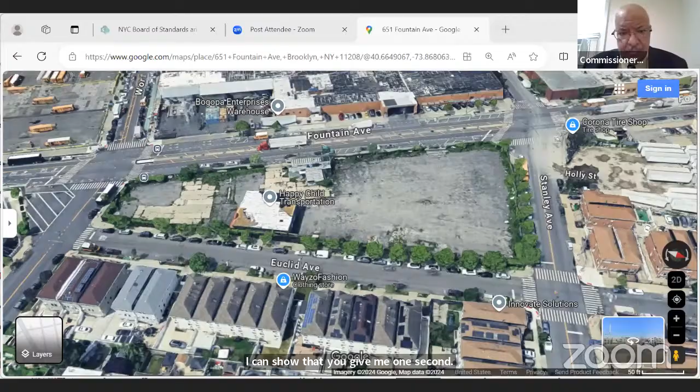Oops, sorry. Yeah, here it's about 10 plus 10. It's almost 20 from the menu board to the fence.

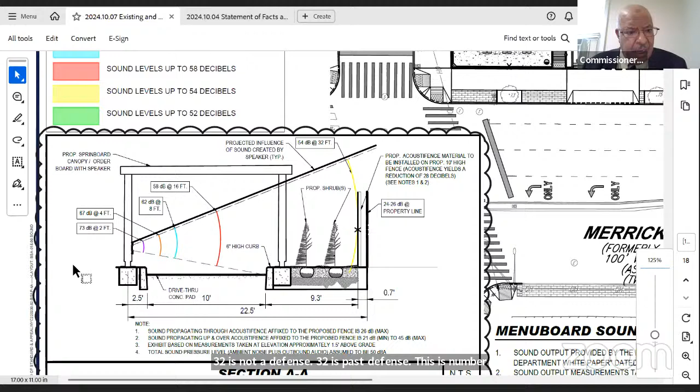Now, if you go to the section, there are two issues with that section. That one - here it shows the 54 contour. It says at 32, which is more or less at the fence. But 32 is not at the fence, 32 is past the fence. This is number one. Number two, I see that the starting point here is 73.

73 - the way the AVC works, it measures the ambient noise. Let's say the ambient is 40, then it adds 15 on top of that. So the output by the AVC is limited to 40 plus 15, 55, not more than that. The way this diagram is built, I believe it's taking whatever the speaker can emit, and running the double distance analysis over the distance between the menu board and the fence. I need them to fix the location of that contour and fix that number to make sure it's the ambient plus 15.

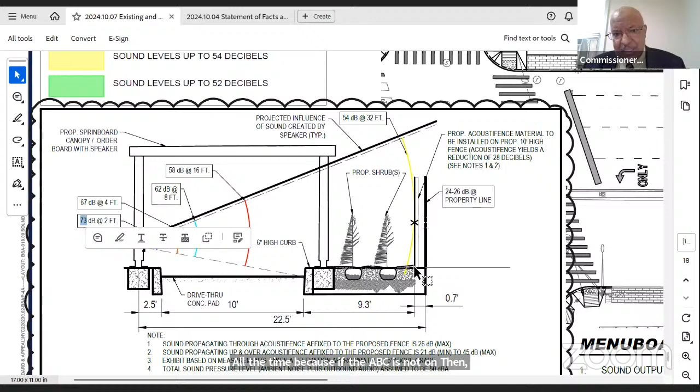And more than that, I need them to put a note on the plan saying that the AVC will be on all the time. Because if the AVC is not on, then noise will propagate to the adjacent property, which we know is close to the building. So very simple - fix that section, and fix that statement that talks about 35 feet between the menu board and the residential property line. Thank you.

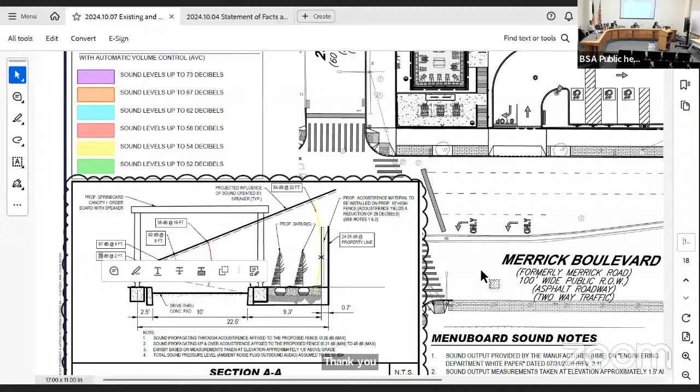So according to the plan, it's 32 feet, not 35 feet. As I'm looking at the plan, from the back of the menu board to the interior face of the fence, it's indicated as 32 feet. I don't... no, that's a typo, I believe. I believe the 32 feet is to the other side.

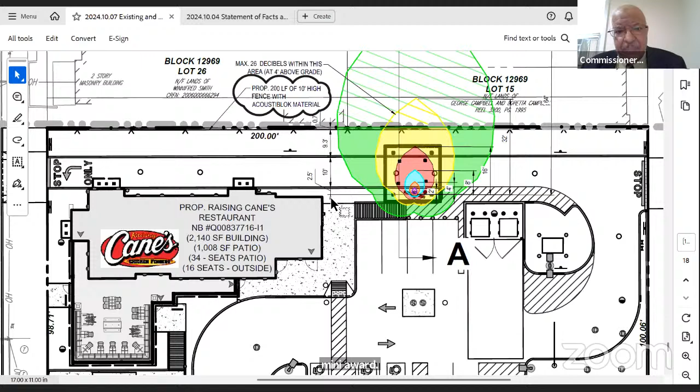If you go to the left of the canopy and the menu board, there are three dimensions actually. The first one is 2.5 - you see that 2.5? That one. The 2.5 is to the center of the menu board actually, and it's from here to that line. So 2.5 plus 10, that's 12, plus 9, almost 20 and change.

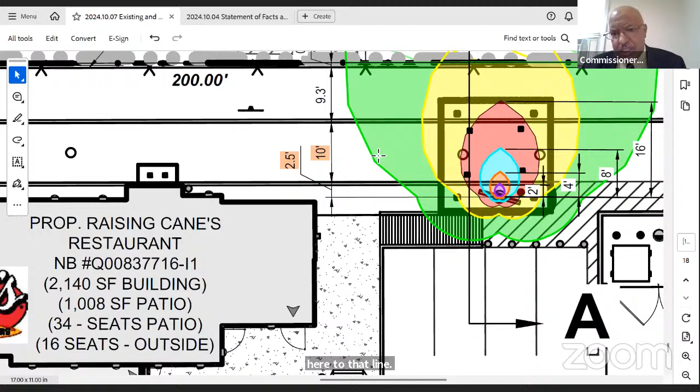Okay, so there's probably something wrong in the dimension, because if you go to the right of the diagram, after 16 feet there's an arrow - I see it. You're talking about this one, right?

That goes to the building - okay, that is the fence. Not to the building, it's to... the tip of the yellow diagram. Okay, I get it. Okay, yeah, I'm reading that incorrectly because that is the fence. That X is a fence thing. No, that thing, I get that, that's it.

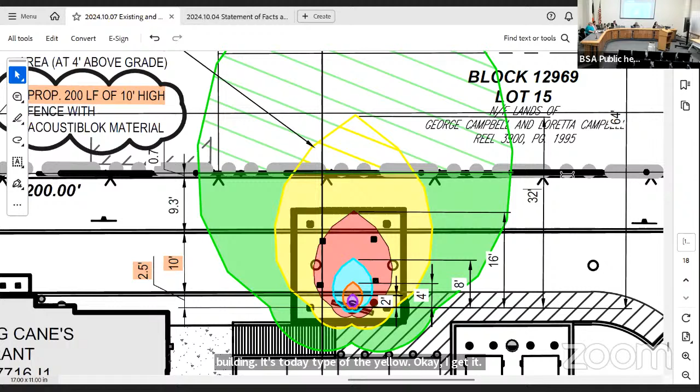It's the triangle - if you see, this is repeated on the fence. This is like an indication or a symbol that indicates the fence. Yeah, I misread that X, it looked like the end of an arrow. Yes. Anybody can do that. Yes, I agree, it's very confusing.

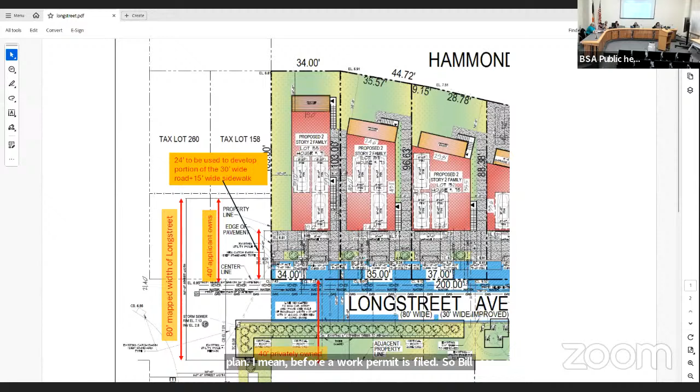I think these are valid questions that need to be delved into, because this would affect the site plan, and any change in the site plan resulting from discussion with DOT or DOB would require the applicant to come back and revise the plan. Based on everything I'm reviewing, I don't think we can allow any construction on this site to start until DOT and DEP have reviewed all the necessary builder's pavement plans, because slope conditions and all of those are important. Until those are achieved, I don't think any work permit should be permitted on this site. These issues need to be resolved before a builder's pavement plan is approved, and before a work permit is filed.

So those are my reasons, and I just wanted to lay it out. I don't think you all had a chance to look through it, but we will schedule this for another hearing, which will also give DOT time to review this application, and we can hear a response from the applicant.

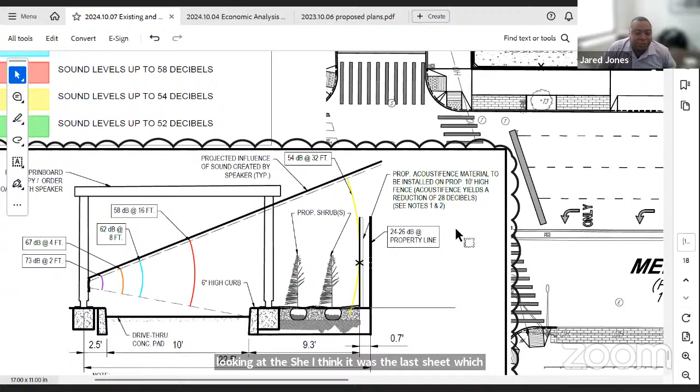Yeah, is that height shown in the plan? Can somebody share the plan? Which height are you referring to, Madam Chair? The height of the canopy or the height of the fence? I want to see the height of the canopy and the fence together and dimensioned. I was looking at the sheet, I think it was the last sheet, which has the section. So we call out the 10-foot high fence. I don't believe we call out the 10'6" to the canopy.

I can add that to this section if you like. Which one? The height of the canopy. Yeah, so the bottom of the canopy where the lights actually are is 10'6". I can add that to this detail or section. Okay, yeah.

And while we have this up, I know Commissioner Shetta had some comments on this section. Yes, I have to go back through this, the numbers are... Can I interrupt you? Go ahead, sir. Before we proceed, regarding the lighting and the obstruction of the lighting in the model with the shrubs, the landscaping, and the fence, the canopy is taller than the fence, so most likely the light can shed over.

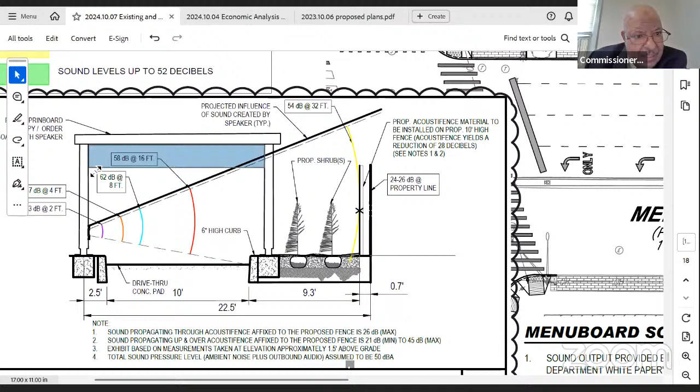Well, I was thinking of a 12-inch shield that may also act as a barrier for the sound. You mean put it deeper like that, along the rear? Yeah. But the sound source is here, so it's not going to help with the sound, even along the rear parallel to the rear lot line.

I mean, we're already kind of taking care of the sound. That's accomplished by the 10-foot high fence and the Acoustifence on it. And if they put the AVC on all the time, they commit to that, so I don't think they have a problem with the sound.

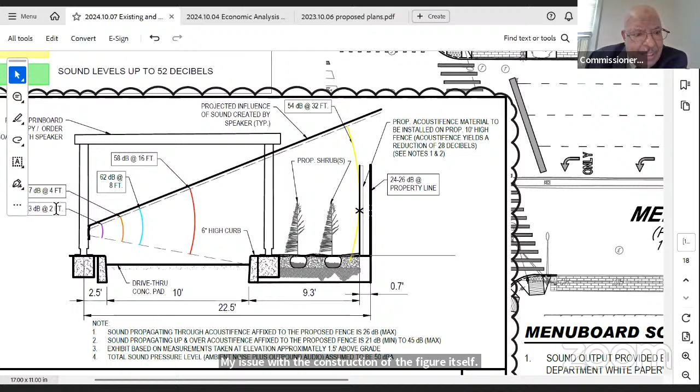My issue is with the construction of the figure itself, I'm not sure if it's based on ambient plus 15 or whatever the speaker can emit. Yeah, this section needs updated. It was based on what the speaker can emit. To your point, yes, you need to replace it. So the AVC will always be on. We'll note that, and these numbers and figures will get updated accordingly.

So a shield across the canopy on 3 sides? For the light? Just for the light, if they shield this long side, that short side, and the other side of the canopy, I believe it would do it. And if they want to put single shielding instead, it's up to them, it's their choice, but I would prefer to shield the lights.

Because this canopy is only 10 foot 6 inches, if you start cutting into that, then you have to worry about cars or trucks, taller trucks, potentially hitting it. So I would prefer to shield the lights individually if that's acceptable.

There's a minimum clearance height that would be needed. So you cannot put it perpendicular to the rear lot line, but if you put it parallel to the rear lot line, that yes, I get it.

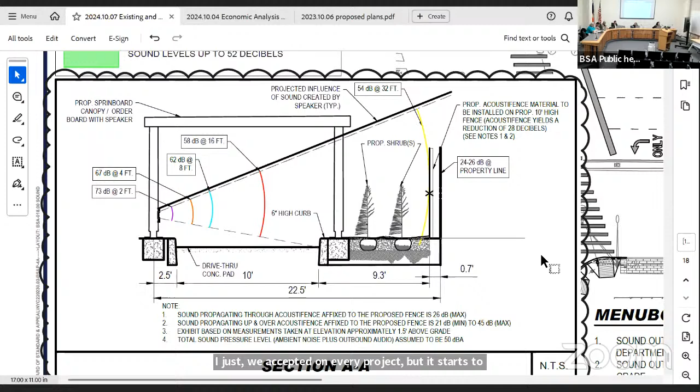We accept it on every project, but it starts to get wonky when it doesn't look proportionally like what is being shown. Is it hard to fix this? It's not hard. Can we update the section to be accurate to the actual project? Yes, we'll take care of it, overlay the rings on top in the correct dimension. You're talking about drawing it to scale. Probably a 15-minute CAD job. I think that would help in the future. No problem, we'll start with this one.

Thank you, Commissioner Yoon and Shetta on that one.

So on the noise part, you're planning to modify the entire diagram to put here, instead of the 73, the ambient plus 15. Do you have measurements for the ambient by any chance? I do not have measurements for that, just the standard accepted ambient numbers, which is generally in the 45 to 60 range.

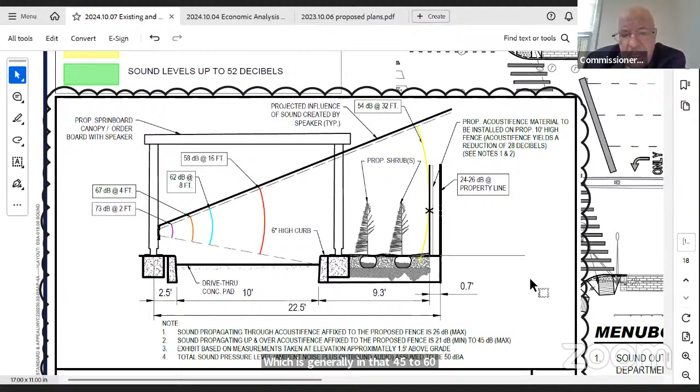So I will update this. The distance is 20 plus, so you're going to be okay either way. I will update this based on making it to scale, and please put that note regarding the AVCs accurate on all plans. Put it on the plans and make it bold, boxed, just to make sure they are aware of that. Will do.

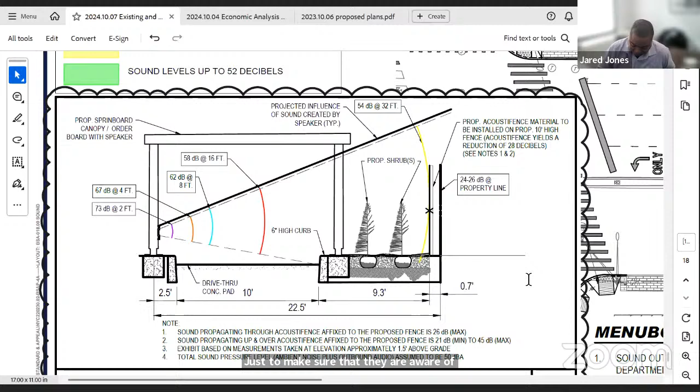Thank you so much. The question I had is, is the light going to be on in the canopy even past business hours? No, the lights are naturally turned off, but based on the comments, we're looking at potentially reducing them just from a safety standpoint at night. But they're supposed to turn off when the store closes. Okay, that's fine, I just didn't want it to be on at its brightest point all throughout. If you're going to turn it off, that's fine, that's your decision, but if you want to keep it to a minimum for safety, that's okay too. I just want to make sure it's not going to be glowing all throughout the day and night.

100%, I forgot to mention that. We can confirm that if they're on after hours for security reasons, they will be at a much dimmer basis. Okay, thank you. Mr. Jones, do you mind also submitting the AVC cut sheet? I know it gets submitted with each project, but it's helpful to not dig around for it in the other folders. No problem.

I believe we've addressed most of the comments. Any other questions? There's actually one I forgot to mention, I believe this was the chair's comment, as far as blocking access to 230th Street and Francis Lewis Boulevard. Mr. Jones has looked at that, there is room to put bollards on either side, so we would propose to do that and put a chain across each ingress way when we close.

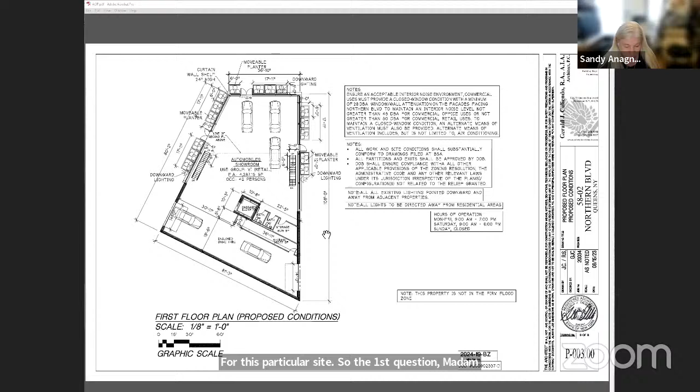So the first question Madam Chair had was to clarify the showroom area. Let me just ask one question. All I have in my record are 6 letters of opposition and 6 letters of support, and a supporting letter from the Queensborough President's Office. I do not have anything on record that shows a petition.

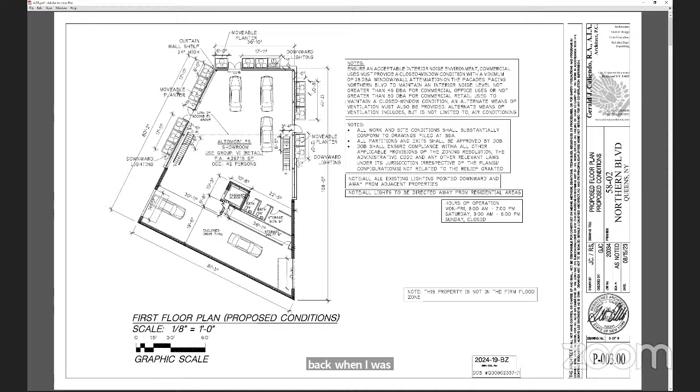We have it, it was submitted, we can resubmit, but it was submitted a while ago, before the first hearing. I saw it back then. It was submitted on July 23rd. Okay, all right, but there's a lot in that file for testimony.

So the total first floor area is 4,287.15 square feet, as noted on the plans. The drive-through area is 1,390.02 square feet, but that is not part of the showroom. That's only for bringing cars in and out of the space, and maybe on occasion if a customer really needs to park there, but that's mainly for getting cars in and out.

The showroom area is here, and that square footage is 3,048.8 square feet, which is the interior area, not including the exterior wall. If needed, we can put those numbers on the plan and revise it to include that. So basically of the total 4,287 square feet, about 1,000 is the drive-through and the remaining, about 3,048 square feet, is the actual showroom space.

So you can see it's not a huge showroom because of the type of operation. It's mostly like retail, not a huge number of cars being showcased. It's a boutique style operation, maybe 3 or 4 cars, not a huge amount. And as we mentioned in the prior hearing, no test driving, no maintenance of cars, no picking up or dropping off cars. So it is a true showroom.

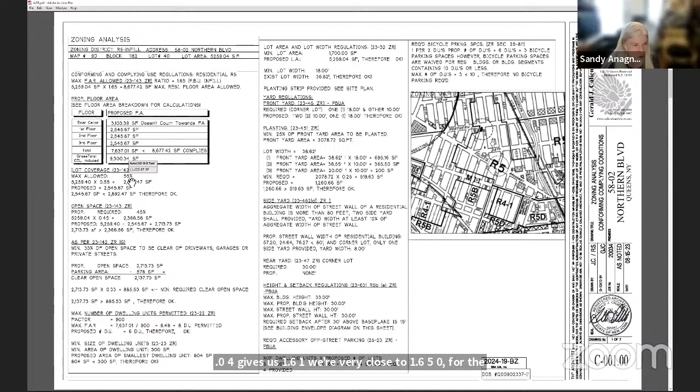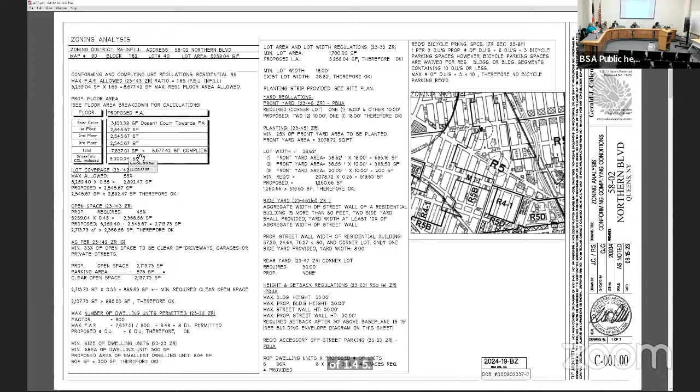For the as-of-right, we have total floor area of 7,637.01 square feet divided by the lot area of 5,259.04, giving us an FAR of 1.45. Predominantly built up is 1.65. So we took a look at this and said, for that 0.20 difference, what could we do?

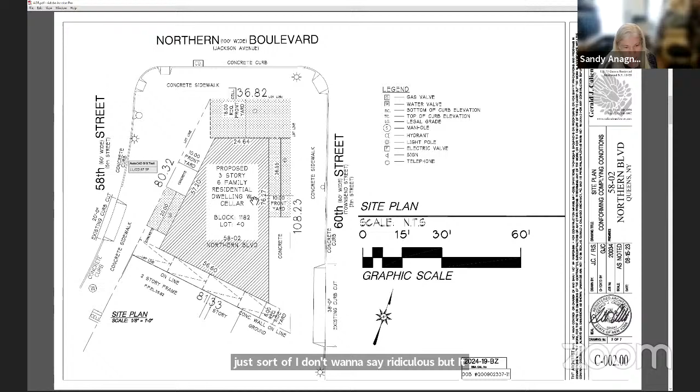Mainly the reason we didn't do that is it's just sort of ridiculous looking at it. I think anything above 30 feet, we have to set back 15 feet. So we did a little sketch here, and what we would end up with would be this triangle, which would be a 4th floor, because we have to set back on every frontage 15 feet.

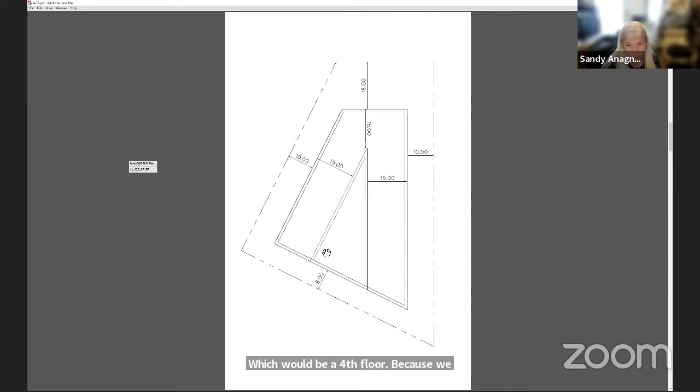Then we quickly laid out what we'd have to do that. It would actually affect the 3rd floor because we'd have to provide a stair to go up there. That would make the 3rd floor unit smaller, and we would end up with this little studio, which is like a true triangle, very odd shaped. So we didn't think that's at all functional or made any sense to build this little triangle up there.

This is very convincing. Thank you. Yeah.

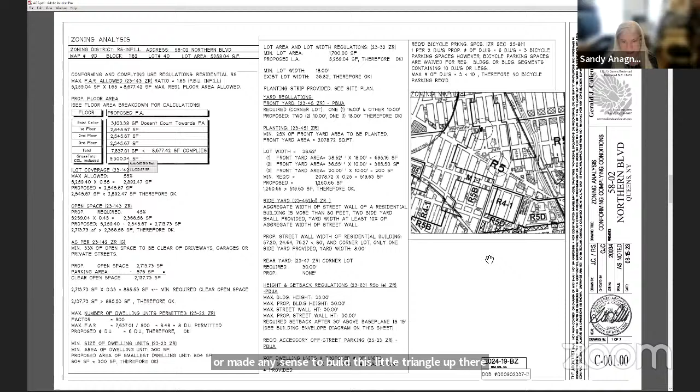Yeah, so these are just the other plans. And then the last...

Comment from the review was the deed for the adjacent lot on block 1182, lot 38, prior to 1983.

We did request that. We were able to get the deed for the subject lot. Looking at other records, the C of O dates back to—there's an NB of 1906, and then another NB of 1936, and a C of O of 1965. We do not have the deed for that lot, but we can request it again from the finance department in order to submit it for the record for the D finding.

But we're pretty confident that they were always separate owners between lot 38 and the subject lot. They were never in common ownership. But we can get that deed. We can request it tomorrow, go to finance, get it, and submit it.

Thank you. Yes. What were the other questions we had? I think that we were satisfied with the financials. I think those were the primary questions.

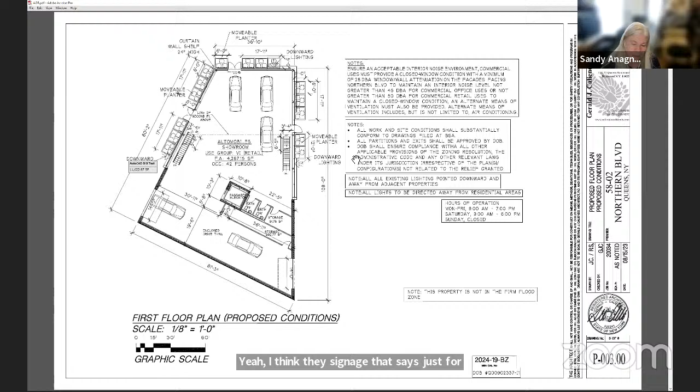It will be only for EV charging. So if you can just get that out in your statement and clarify. Okay.

Any other questions or comments? Okay, let's then go to the public.

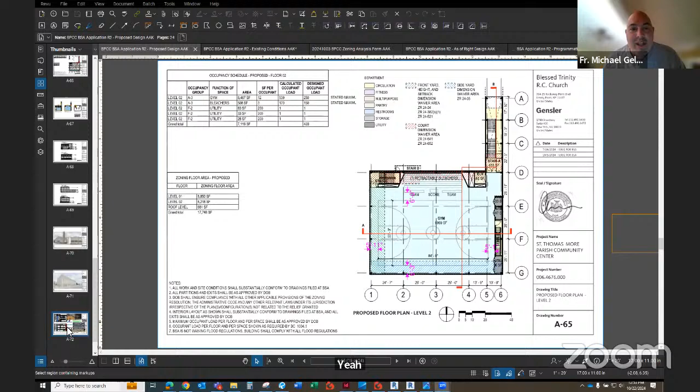So with regard to the height for volleyball, depending on who you're looking at with regard to the regulation, it seems that our research shows 23 to 26 feet for regulation play. That's unobstructed regulation play, meaning once the ball hits something less than that height, it's out of play.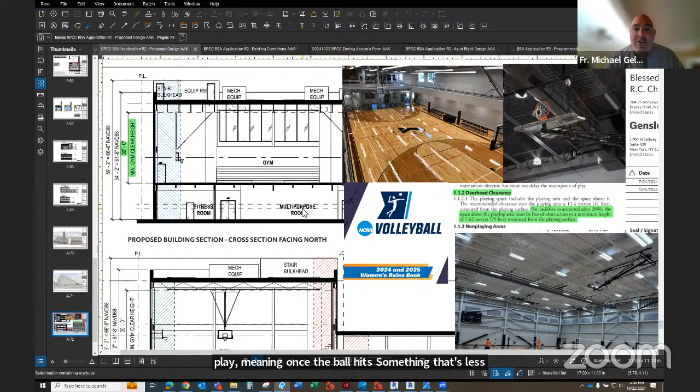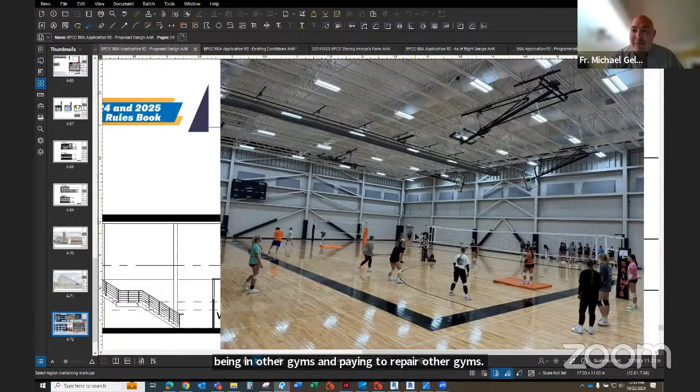The reason why we're requesting 30 feet is because, being in other gyms and paying to repair them, we know kids do not understand how to keep a ball within 26 feet into the gym play area. We're worried, as our experience tells us, that they're going to hit the lights, they're going to hit the ductwork. Plus, if we're playing volleyball, we need to roll up the basketball hoops into the ceiling, as this picture shows, so we have to get above the 26-foot height so it's unobstructed for volleyball.

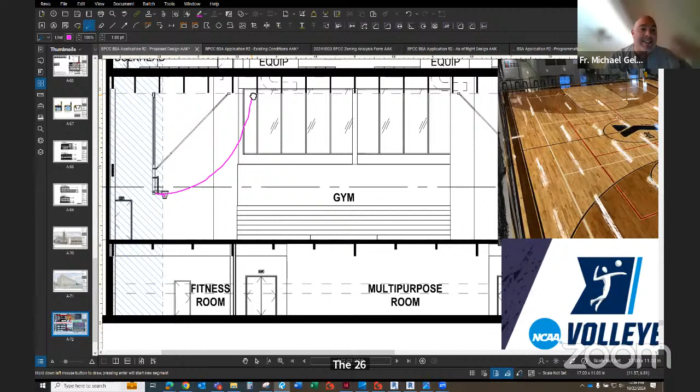So that's the reason we're asking for 30 feet of clearance so the hoops can clear it, along with the lights and the ductwork. Okay, that's good—if you can just put that in your statement, because that goes toward your finding for the waiver request.

Yes, we can elaborate on that in the statement as well as the programmatic needs report. We'll also clarify the portion of the runoff, just to make sure it's clear what we're requesting versus what's regulation—just showing the dimension.

So the 6 foot doesn't include the bleacher, it is past that. The bleachers are retractable, but regardless, even if there's one game held in the facility, there needs to be space for the audience, for the parents to watch the kids, for other attendees. So that's going to stay there for the program. Okay, good, thank you—no problem.

The board had also made a request with regards to the history of the site, specifically with the Breezy Point Cooperative. We've actually submitted Sanborn maps as well as a plot card for the site. We've exhausted all of the DOB records associated with this property to try to get a bit more background on the dimensions. We just wanted to clarify with the board what additional information you'd like us to submit.

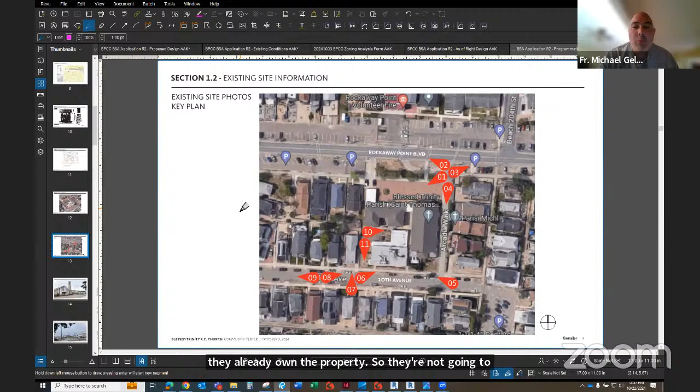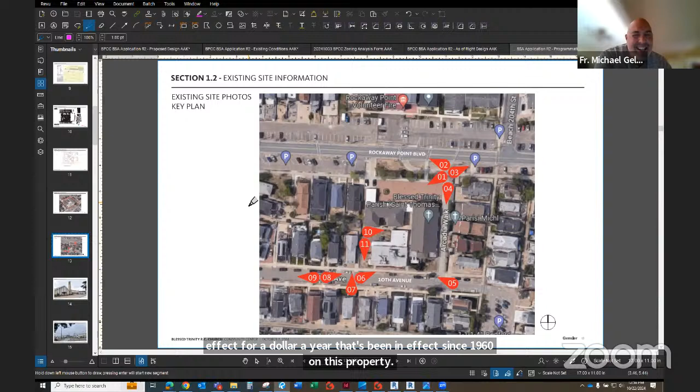We have a lease with the Breezy Point Cooperative, and in that lease it requires them to always provide the parking, but it also can't be taken away because they already own the property, so they're not going to take it from themselves and reassign it to themselves. We do have a lease in effect for $1 a year that's been in place since 1960 on this property, and it does talk about some of this. I don't know if that would be helpful.

I think that would be helpful if you can provide that document—it would actually clear up most of the questions I have with regards to the parking, and you can put that in your statement also.

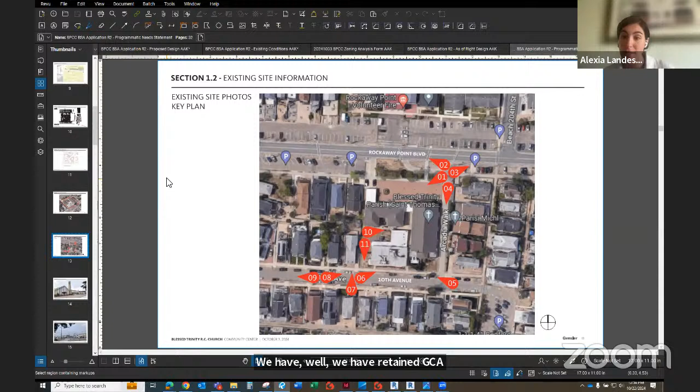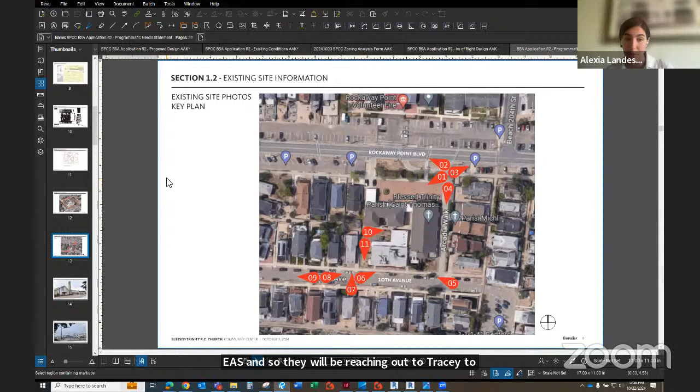Will do. This brings us to one of the last comments the board made with regards to the environmental review. We've retained GZA to assist with the EAS, and they'll be reaching out to Tracy to make changes to the short form that was submitted, as well as providing all the necessary submissions for the EAS as a whole. Once they run their traffic study, I think there's a lot of information we can incorporate into our findings as well.

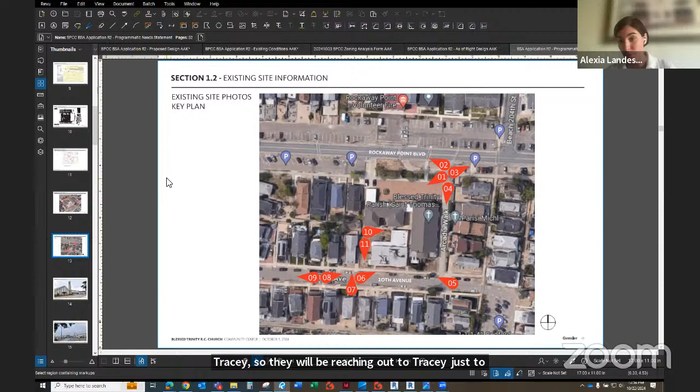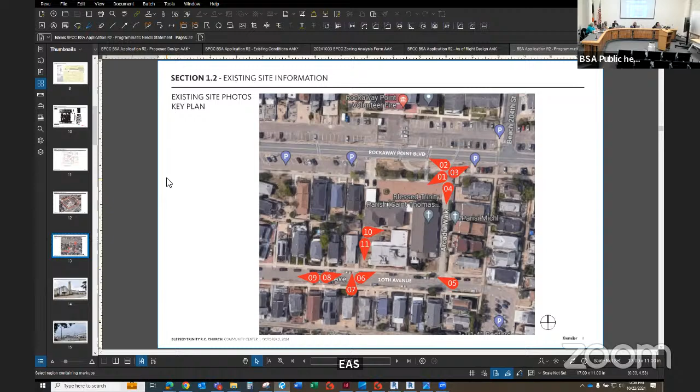Okay, I think with regards to the plans, those dimensions that I was mentioning - yes, and with that I'm actually going to hand it over to Gensler's team so they can share their plans, and then we can go through the board's comments with a fine tooth comb to make sure we submit correctly next time around as far as dimensions.

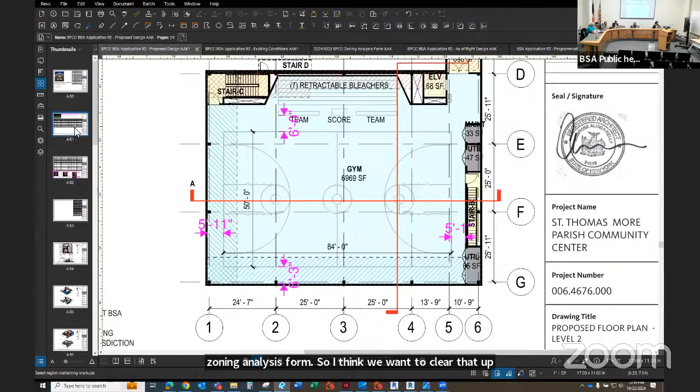And I think there was some confusion as far as the zoning analysis form, so I think we want to clear that up. Right, so the zoning analysis should be for the entire zoning lot. In this case, the zoning lot includes the 2 existing buildings, the rectory and the church. So your total zoning floor area should be the zoning lot, including the existing plus the proposed.

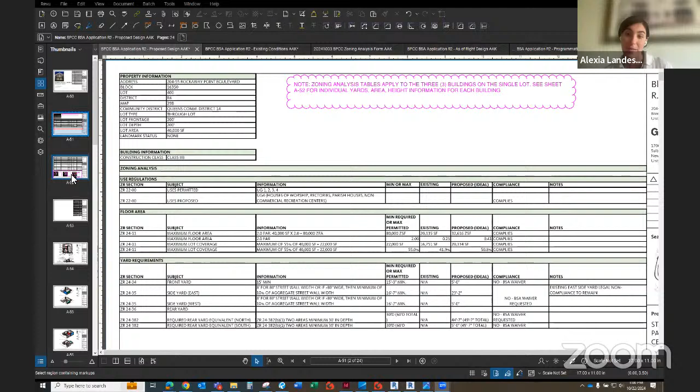I believe that was submitted originally, and then there was some discussion at the last hearing with regards to really making sure we clarify what is happening with the gym specifically, which is why we've submitted this zoning analysis to just include that building, so we can show you what the existing looks like versus the building height, because it can get confusing with regards to the heights of all 3 buildings.

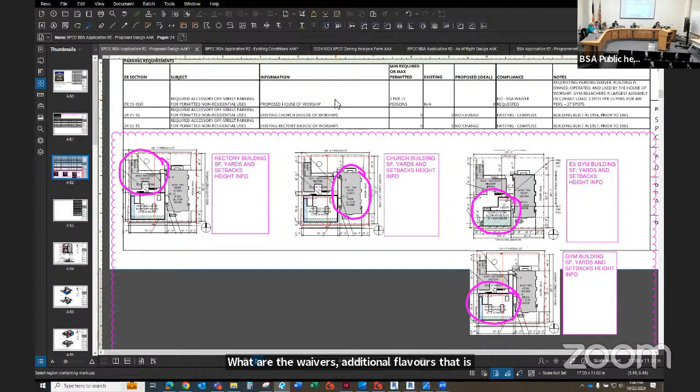Fair enough. But for the total zoning analysis for the zoning lot, it can be done in ways which show the entirety of the site - proposed entirety, what is the proposed floor area, existing and proposed, everything combined - and then specifically for that building, what are the additional waivers required. So you can have a third column specifically for the gym building indicating where the encroachment is for the yards, courts, and heights.

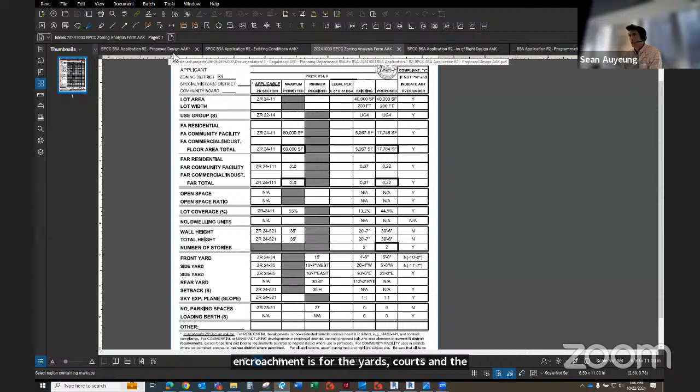Would it be helpful to have a breakout page that shows square footage, building height, yards, and setback for each individual building? And then the form and total zoning analysis will be for all 3 buildings on a single lot.

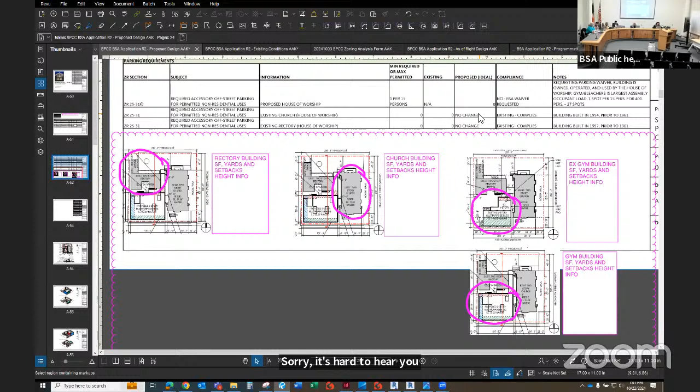Sorry, it's hard to hear you. So the only thing - for the total floor area, I don't want the breakdown of the other 2 buildings. I just want the total floor area on the entire zoning lot, including the existing, because we are not ruling...

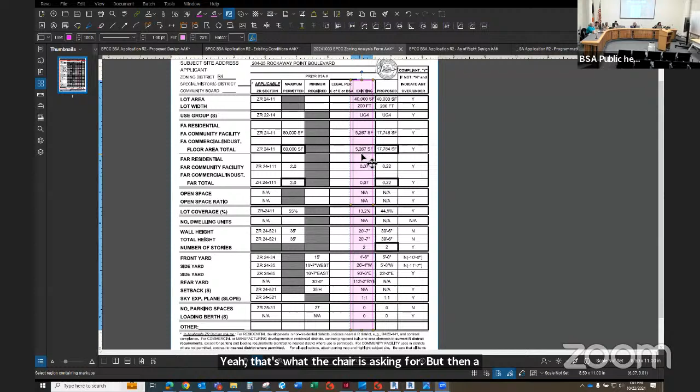Just to be clear, the zoning analysis form should be - and contrary to what I said at the last hearing, I realized - this should be for the entire site. Yeah, that's what the chair is asking for, but then a separate breakout chart in the drawings for the building in question only. Right, okay, so just for the gym - the existing gym building and the new gym building for comparison.

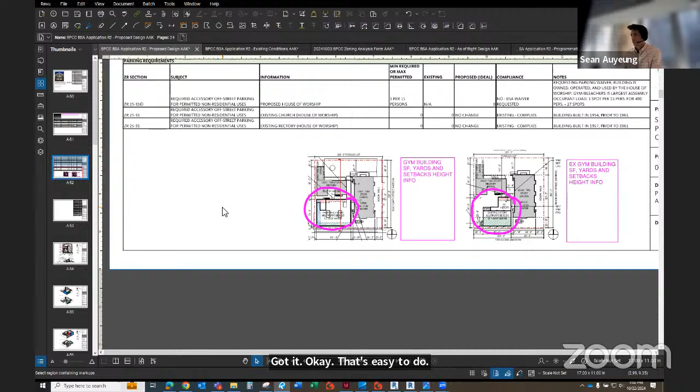Got it, okay, that's easy to do. We don't want any more information than we need with regards to the existing building. We just want the proposed. Okay.

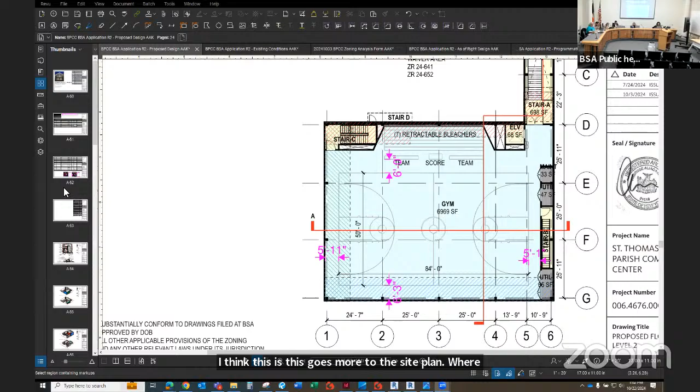And then I believe there was some request for dimensions, which we will provide to the board. Is there any specific dimensions the board is looking for? I think this goes more to the site plan where you're showing the area of encroachment. The proposed area of encroachment needs to indicate what these areas of encroachment are pursuant to which zoning resolution section. So I was just talking to Ms. Prenga, and what we'll do is give you a sample so you can indicate those on the plan.

Perfect. And then finally, I believe the Commissioner had made a mention with regards to the side yard and pushing that back to make it 6 feet. I believe we took a brief look at it - Sean, if you want to pull up the plans or the survey.

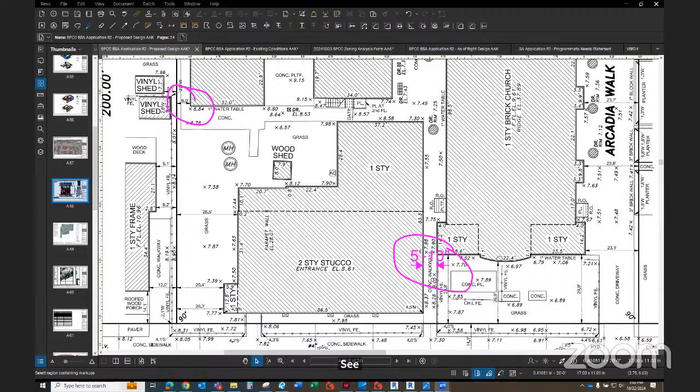Right, if they end up making the side yard 6 feet, I believe it's going to push the building - it would push us 1 foot further to the east, in a narrow way. You're breaking up, Alexia, you're breaking up.

Let Mr. Aya respond - maybe Mr. Aya could respond. I can jump in here, Amanda Iannotti. I think what Alexia was saying is if we push the building 1 foot east as requested by Commissioner Yoon, there's a pinch point there with a little jut from the church building that would then, right now at 5 feet, have a clearance of 5 feet 10 inches between the buildings.

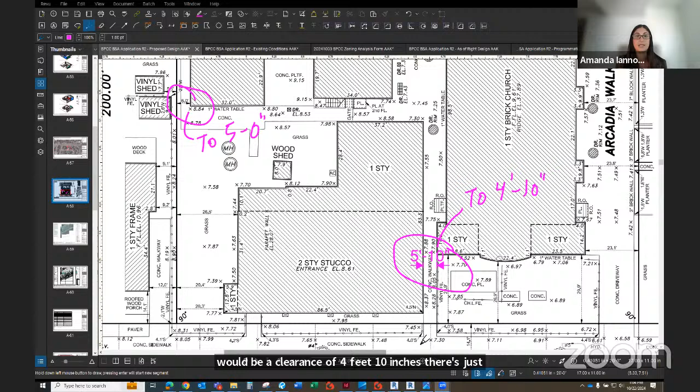If we move it, it would be a clearance of 4 feet 10 inches. There's concern about interior access on the site, or emergency services. 4 feet 10 inches is pretty tight. I mean, it's already tight, but it would be even tighter.

The thing I want to ask you, Chair, is that there's an existing condition that is a 6 foot wide side yard. That's basically the northern half of the site. My request was to match that because the required side yard is 16 foot something, 16'7" I think. We could squeeze the building a couple inches to get them what they need, or we can keep the 5 foot side yard that they're proposing.

So based on the programmatic need argument, they've already seemed to have compromised the runoff area for the courts. Standard requirement is 10 feet, it's been pinched already to 6 foot. So the only other alternative would be moving the building further to the left, which would result in the building being much closer to the residential building located to the left.

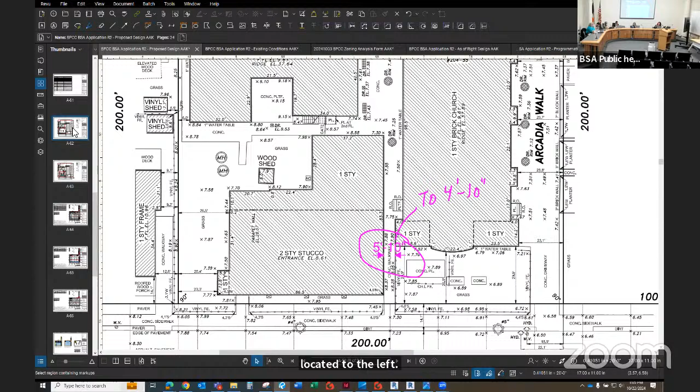And I think while you're okay with a 5 foot side yard, I'll drop the issue. I agree with you, because of those arguments. It would be ideal to have a continuous setback, that would be the ideal solution, but the bulk being away from the residential is preferred than bulk being closer to the residential. That's why I'm asking for a 6 foot side yard.

Well, I have a question. Is there any way you can make it 5 foot? Would that be too difficult? The side yard is 5 feet. No, no, no, on the right-hand side the distance is 5 foot 10 inches. If you were to make it 5 foot, would that be too difficult? That means shifting the building from 5 foot 10 inches on the left to 5 foot on the right. Would that be too difficult to do?

Would that also shift the access passageway though? Because right now the access passageway butts up against the rectory. So then there would also be... well, I guess we could extend the passageway. We wouldn't want to put a 10-foot break. We could look at how close that pinch is between the existing stairs that come out of the church entry.

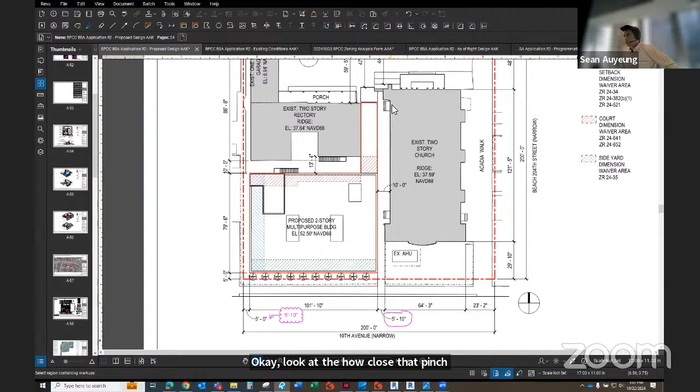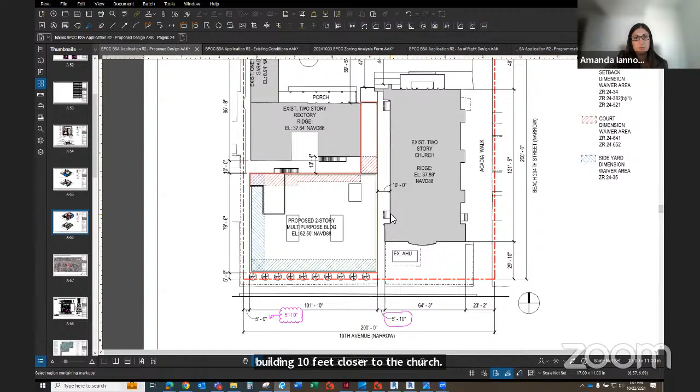Okay, so you're okay with that. I think it would extend the passageway 10 feet and then move the building 10 feet closer to the church. The interior passageway there would just be decreased the whole lineup.

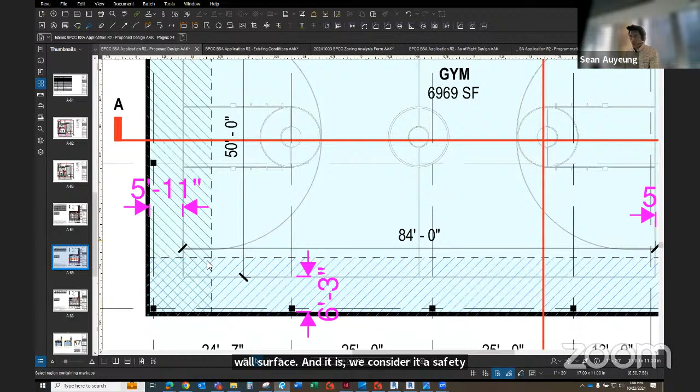If it's okay, just a quick thing about the basketball sports runoff distances - while we're measuring, what you see here is 5 feet, 6 feet, that's to the wall surface. We consider it a safety issue. Columns for the structure will be inboard of that. So while there is generally 6 feet or 5 feet on the ends for the areas where the columns are, they will be padded, but at the same time they will probably be 1.5 feet shorter. So every few inches that we take from the overruns...

Not that the court is unsafe, but it becomes a little riskier for bigger kids who are running faster. And that's why the 10-foot is not a set regulation by any sports governing body, it's a best practice for player safety.

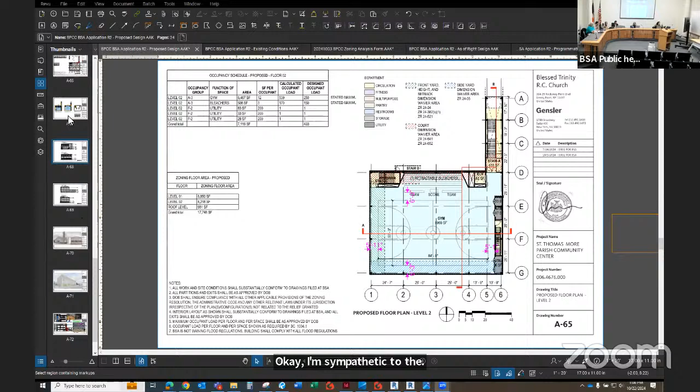Okay, I'm sympathetic to the present situation and let it be there. Let it be. I understand the pinch points and the unnecessary added cost of construction to provide a more uniform expansion. I don't know if you can align it. Can you align that, keeping that same dimension, but then you don't have a continuous...

So here's a question I have. You leave that annex area where it is, you don't need to move that annex area. Can you move the rest of the building just by 10 inches? Will that misalign anything?

Be closer to the... yeah, but it would be still 5 foot from the rectory.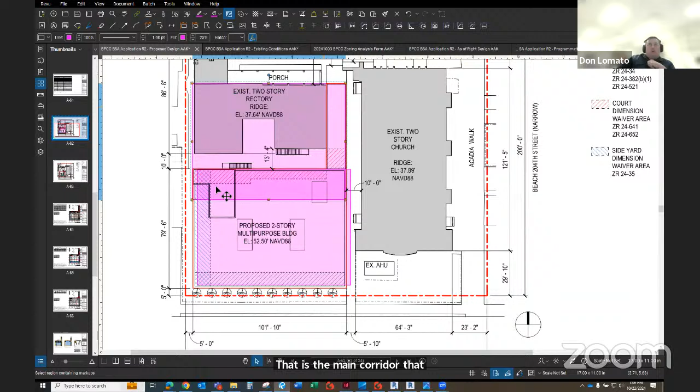Madam Chairman, if I could, when shifting it to the right towards the church, what will happen is you increase the hallway width, the main corridor out to the street level towards Rockaway Point Boulevard. Doing so increases the footprint of the area and the square footage of construction space, adding additional construction costs that were not anticipated.

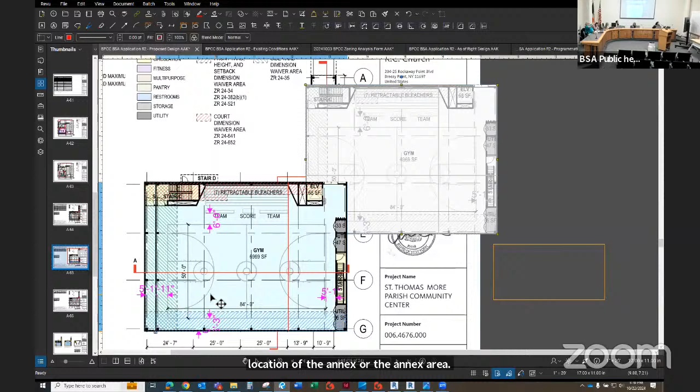No, I'm not asking for that. I'm saying let the annex be where it is, what you're proposing. There would be no change to the location of the annex or the annex area. Only thing I'm suggesting is moving that gym area, but just by 10 inches. So shift the box over 10 inches. That's it, there's no change in the program, nothing.

So you end up still getting a distance from the church, which should be instead of 5 foot, 5 foot 10, and you allow for a little bit more separation from the side yard on the left-hand side, and leave the corridor as is. You would still maintain...

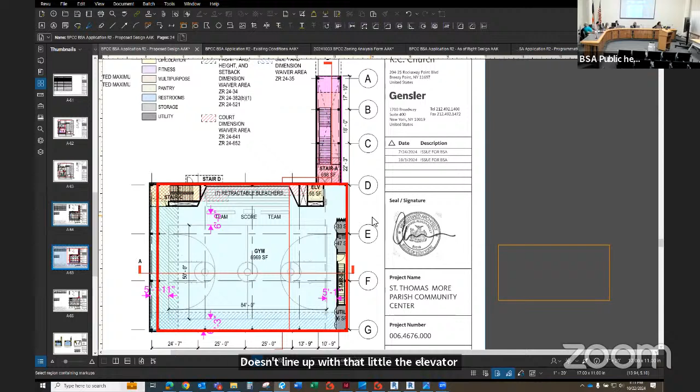I think it's gonna take some interior redesign work, because you can see now that doesn't line up with the elevator. Yeah, but it's only 10 inches. I think it's too early to say that 10 inches can't be accommodated in the interior design. I think it's more of a structural issue when you come into flood mitigation and things of that sort, with this small corner here, because the design of the structure is a continuous wall.

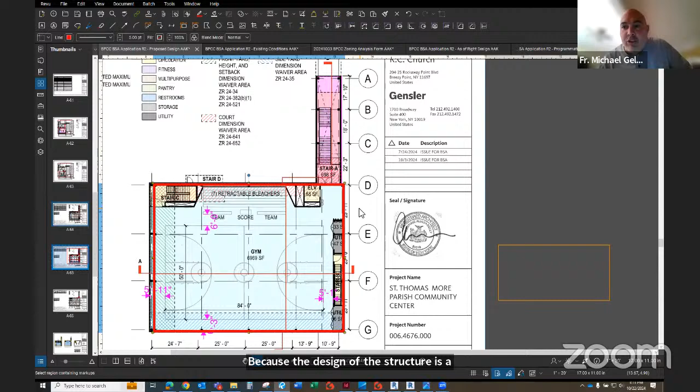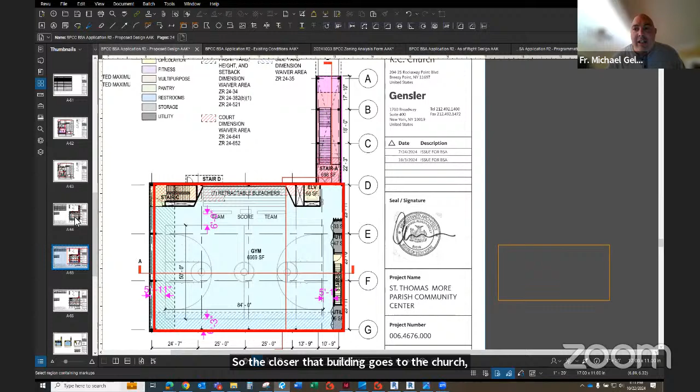Donnie, that's correct. And also we have to keep in mind that moving the building closer to the church—I'm not going to approve that—because we need to get light to the stained glass windows. And we have to maintain drainage on the side of that church because we're on sand. So the closer that building goes to the church, it starts to compromise some of the elements being preserved on the church itself, which may not really show on paper.

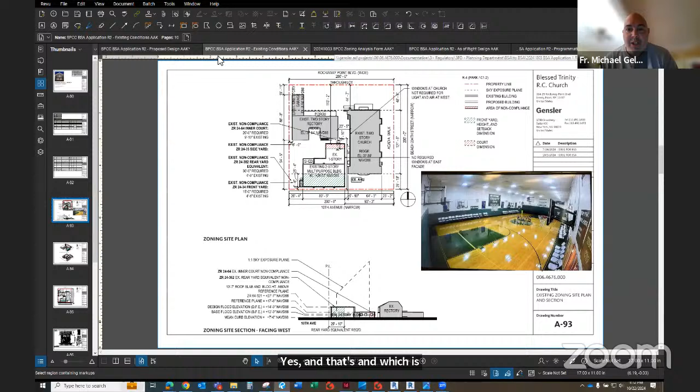So there are stained glass windows along that frontage, along that side? Yes, and that's why we did not attach the gym to that side of the church. We left, if you will, that little alleyway so we can get air and light in there and not block up the windows. The rectory is not an issue, but the church would be—yeah, you can see them there.

So what already exists works. Moving it closer, we're now getting into something new, and we would have to look at that to see if it would fly with the trustees and the people.

Okay, maybe I can suggest something. 10 inches across this expanse is quite minimal. It is not an interior design problem—it's too early to say that. It's not a structural problem—it's too early to say. It's 10 inches on a 90-foot wide building. But given that I am splitting hairs one way, I also think it's splitting hairs the other way. So we can leave it as is.

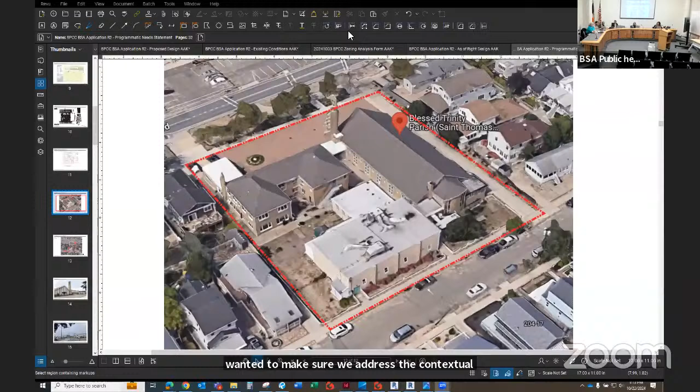I just wanted to bring it up because it's something we look at when we look at side yard waivers. But that's now where I'm going back. Okay, not the hill you wanted—okay, not the hill you want to fight. I think the program needs the space and it is quite tight. Okay, and it does seem to be a minimal response. I just wanted to make sure we address the contextual precedent and that we're just addressing that issue, that's all. Right, okay, fair enough.

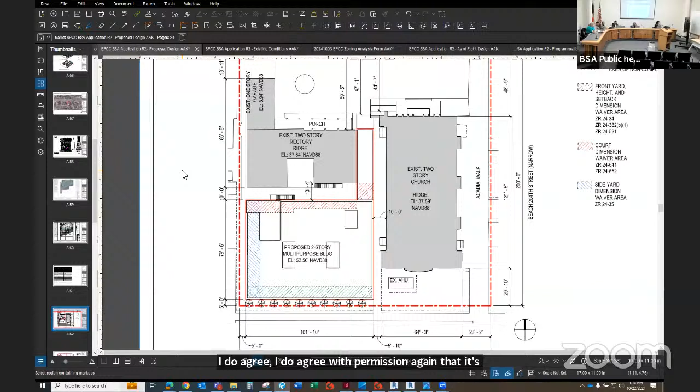I appreciate Commissioner Yoon's consideration. I do agree with Commissioner Yoon that it's not going to be that difficult, but the programmatic need is very tight, and we definitely don't want to take away anything from it. Honestly, we don't know much about the site detail, about the drainage condition of the existing site and where the drains are and other factors.

And the proposed building is going to be 30 feet high, even though it's set back 5 foot 10 inches from the rectory, it is going to be much taller than the one-story building that is there. So the windows are going to be blocked by the 30-foot high building being proposed, where the one-story building is. So it's already a change that's going to happen, so a 10-inch shift is not going to be that much.

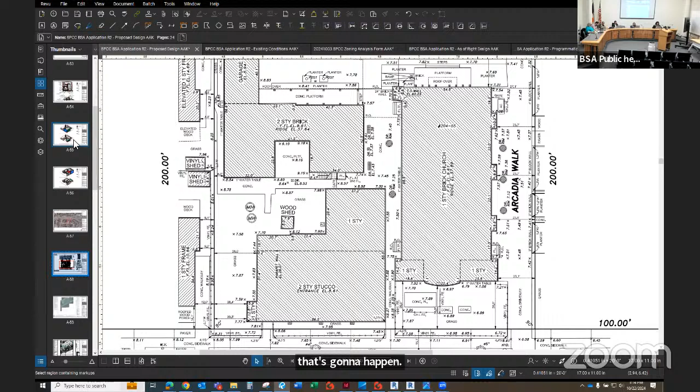I don't want to belabor this part of it. Yeah, so if you superimpose the one-story building—a portion of the building is one story—that's when it's going to be 30 foot. So yeah, that's the difference.

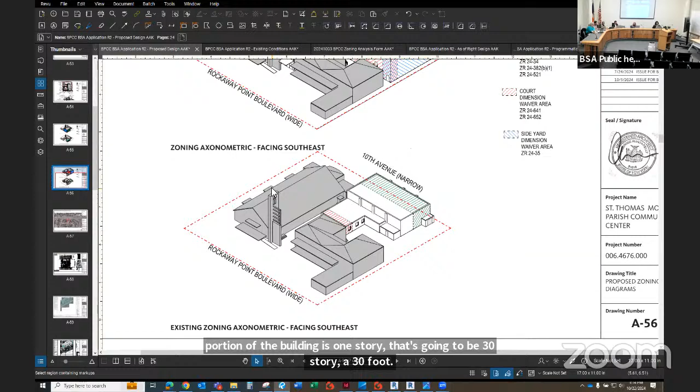I would request that you provide a much more opening of light or well or something along that frontage, because that is a very solid high wall on the side lot line. Make it look lighter in appearance for the residential building next to it. If you're going to maintain that, give it some lightness.

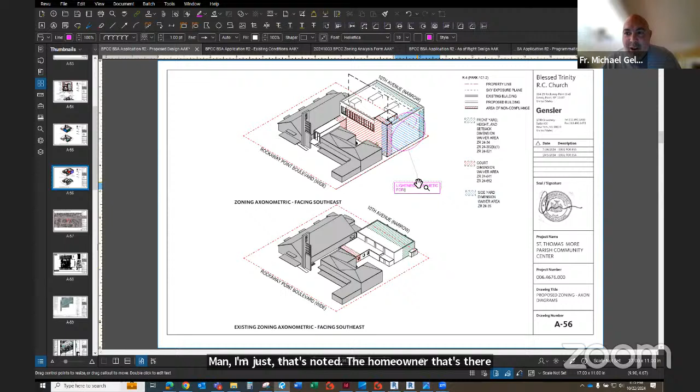Madam Chair, that's noted. The homeowner there requested that no windows be on that wall, and he wants us to landscape it, which we're going to do. We can provide a cover letter with all those statements clarifying that. Will do.

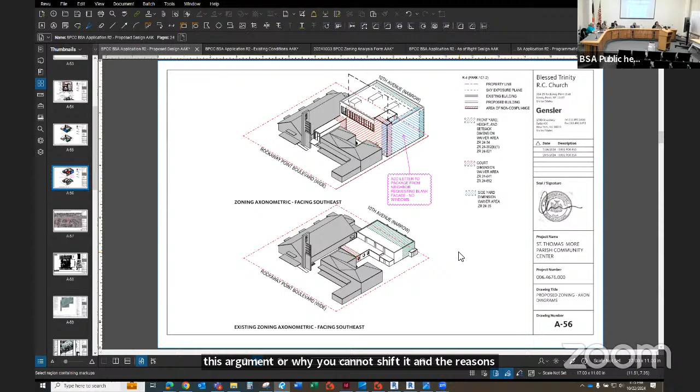So, Ms. Landesman, in your statement, go through the argument of why you cannot shift it, with all the reasons laid out. We'll make that argument. I believe that was really the extent of the board's comments regarding what we need to provide. We'll probably finalize those dimensions once we get a sample from the board, then send it to Jella prior to making a formal submission, just to make sure we don't go back and forth, and provide all the materials correctly.

Since you said your neighbor next door wants landscaping in your plan, please indicate the landscaping being proposed along that lot line. I don't think I saw one, since we were told it's a very difficult place to plant anything, given it's a flood zone. So please add those plantings.

Apparently there were cypress trees all along there that got wiped out during Hurricane Sandy, and he wants them back, so we promised him we would put them back. That's wonderful. Just revise the site plan to indicate that and provide the kind of landscaping, the depth, and all the information on the plan. Noted, yes.

Okay, to the public. Yes, let's go to the public. The case currently being discussed is 2024-21 BZ, 20425 Rockaway Point Boulevard, Queens.